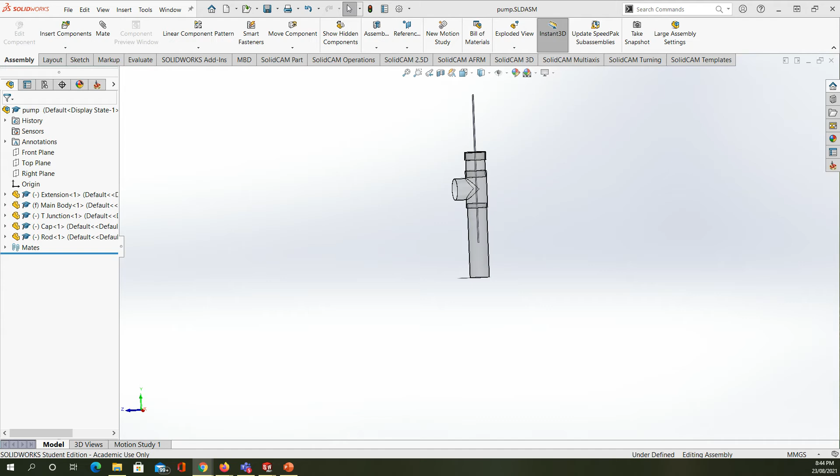Okay, so we come back to the second part of this tutorial, and I'll show you how to bring the shaft to the assembly during the lecture. As you can see here, the shaft has been inserted inside the hole and it can go up and down to do the pumping process.

Now what I'm going to do is bring the other part, which is the valve, and include it in this assembly. Just remember that I'm not going to consider the threads or the nuts here. I'm going to bring the valve and attach it to the end of this shaft. Simply insert the component - that's my valve. I'm going to put it somewhere near here.

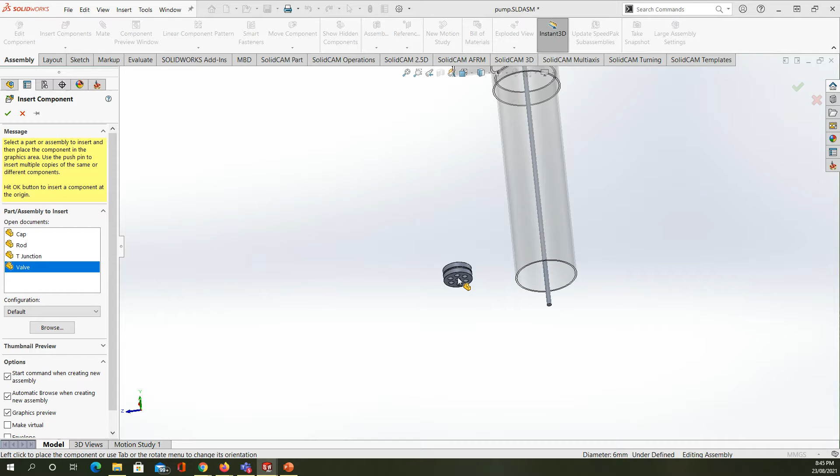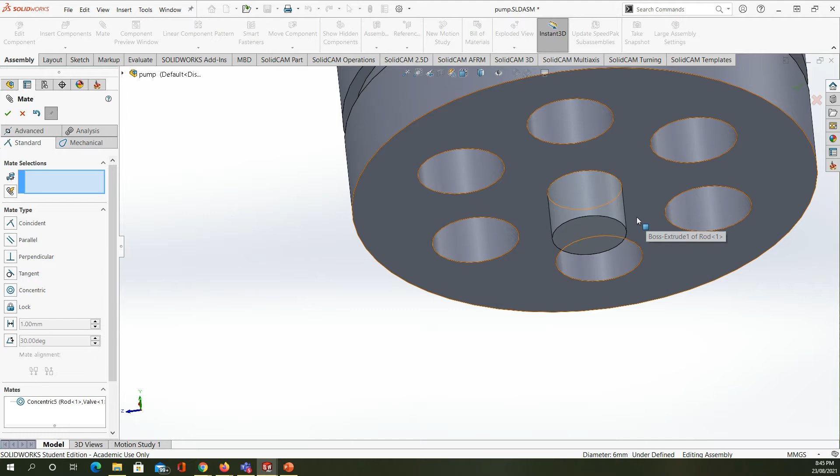And say OK. Now I'm going to do an attachment process. My mating is going to be for the following: the outside surface to the inside surface of the middle hole - that's number one. And say OK. And the other is going to be between this face and that face. And say OK.

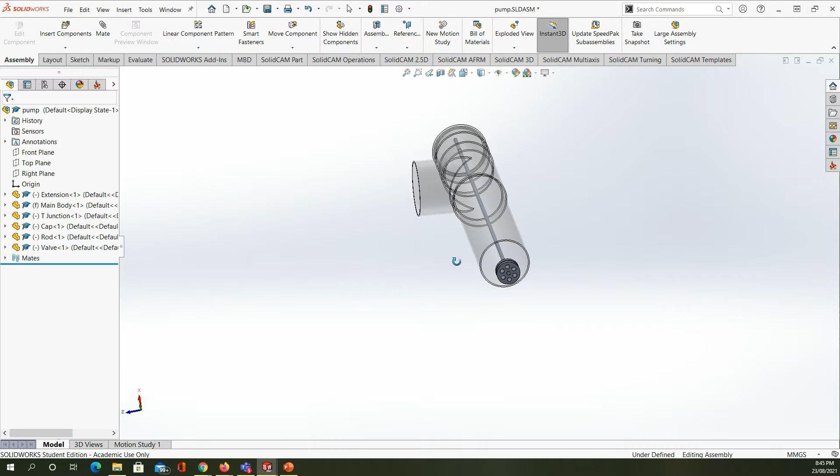I think I have wrong dimensions here. What was the diameter I used for this one? Anyway, I'll check that because it seems to be too small regarding the other dimensions. So let's go back and try to check the dimensions we have for the valve. I hope I'm not doing the wrong thing - because I left that for 1 hour, 2 hours, and I had to go do it once again. The diameter is 37.5 millimeters.

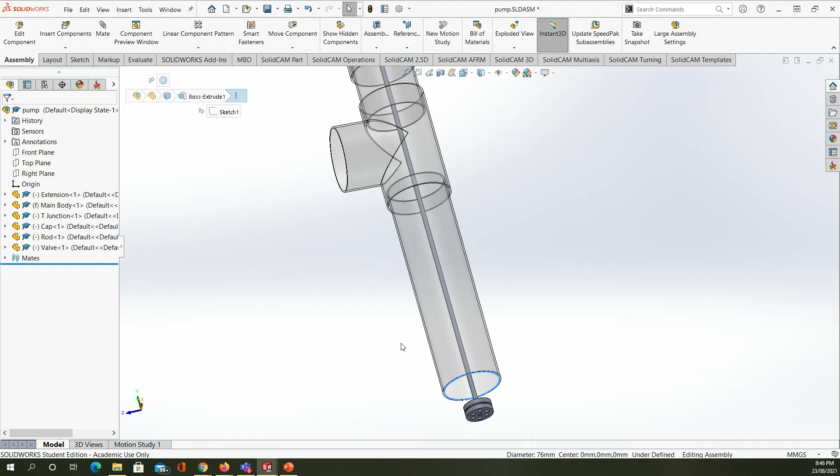Okay, so what was the diameter we have here? Why do we have this difference? 76. Ah, I just remembered - I added the radiuses, not the diameters. Sorry for that.

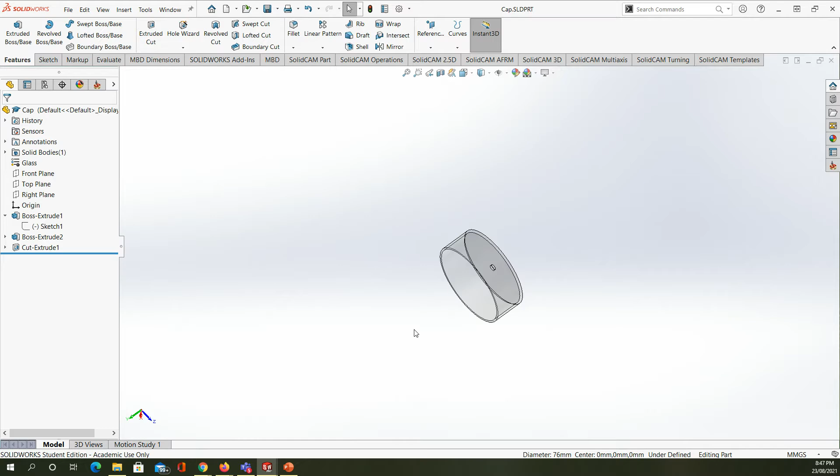Okay, well, we could consider making the bigger valve, or I think the best thing is just to change all the dimensions we had earlier and go back to the original dimensions we have. I know this may be a longer process, but this will actually be a good revision for what we had earlier.

So I will start with this one first. I did the sketching and I'm going to choose this one. It said the diameter is 84. I would like to have it as half of that, which is 42, so the radius is going to be 21. Okay, say okay. I know it may give me some errors, but I can try to fix this error as I go.

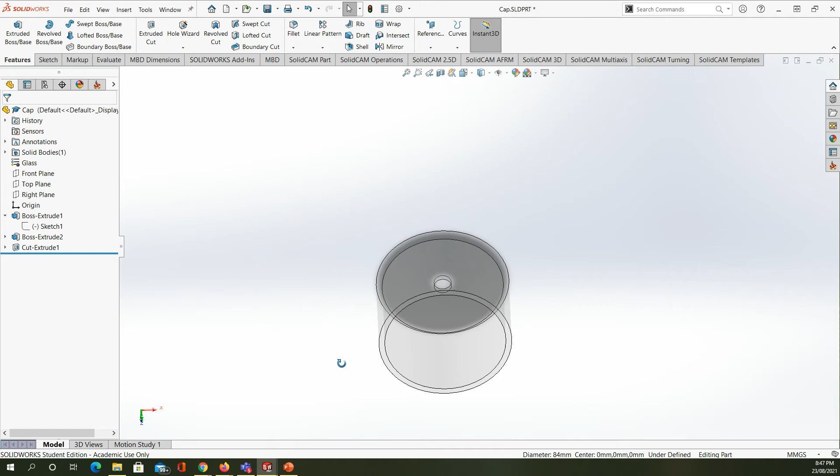Okay, now I have the small cap here. So I finished the first part and save this one. I don't want to show you the assembly now because definitely it's going to be the wrong thing. We'll go to the T-junction and again I need to fix all the dimensions.

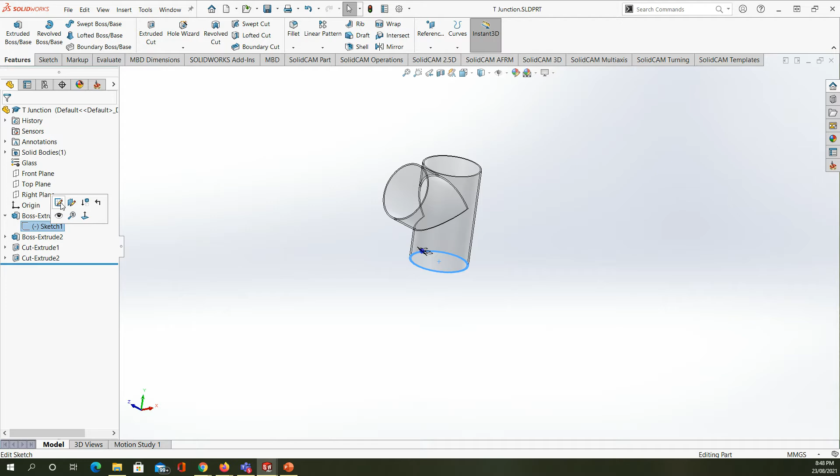As we can see here, the dimension for this circle - second - the diameter is 84 and I will need to reduce that. So starting here at the beginning, 42 for the inside one, and good - so this will be 42 again, which is 21 as the radius, 21 here.

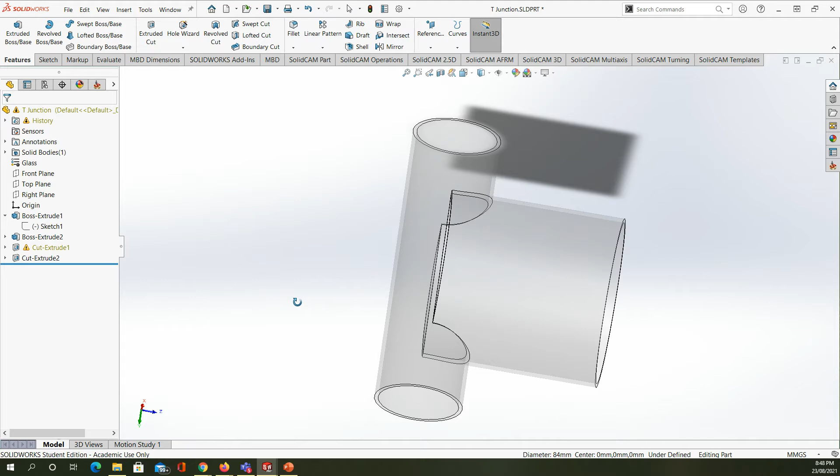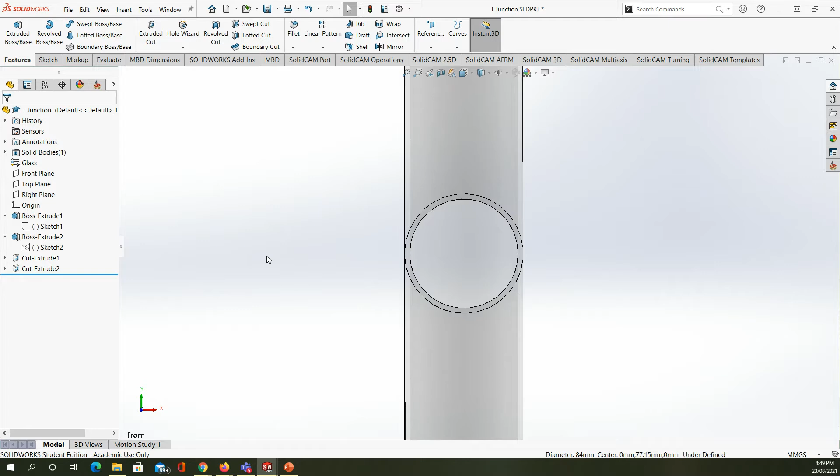Okay, and exit. Continue, ignore the error. Okay, close, because I have to change the rest of it, which will mainly be changing the diameter here. So I'm going to fix this one first, edit, and change this one to 42, just make it 21 for the radius. Say OK, and exit. It's going to give me the error message maybe again. No, now that's it. Okay, yeah, now it's all done.

So I'm going to save this part, and the other part I'm going to change is going to be the main body. So I'm going to open the main body and change the dimension of this one - simple pipe, sketch that. Change the internal diameter to 38, half of 38 is going to be 19. Say OK, and fix it.

Now the pipe is the good diameter. And finally, I have the extension. Where's the extension? It should be here. Okay, from the node, I get to open it, and I get to fix the extension and fix the diameter of the extension part.

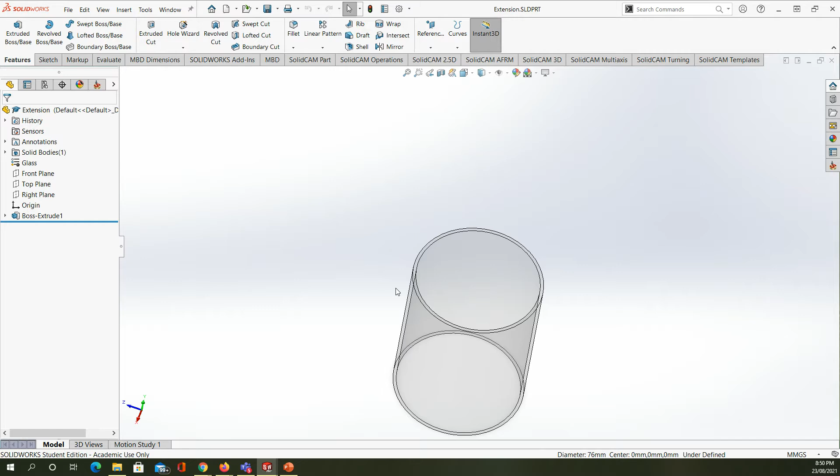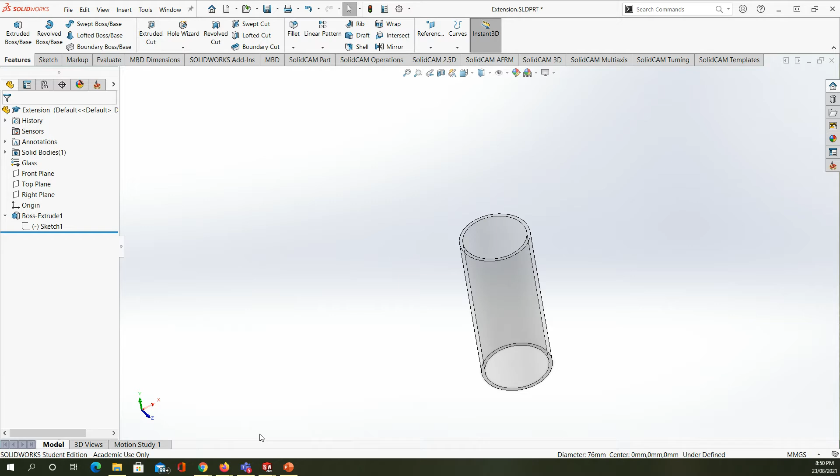Okay, make this one 19. Now we have all the parts ready, and we are going to go to the assembly and see what happened. It will ask me to accept the updates in these parts, and I should accept these changes, so I'll say yes. Okay, now I have the correct size.

So now, once again, you can see that the shaft is going to be working inside and outside the pump, doing the stroke as we said. So later we are going to add the ring.

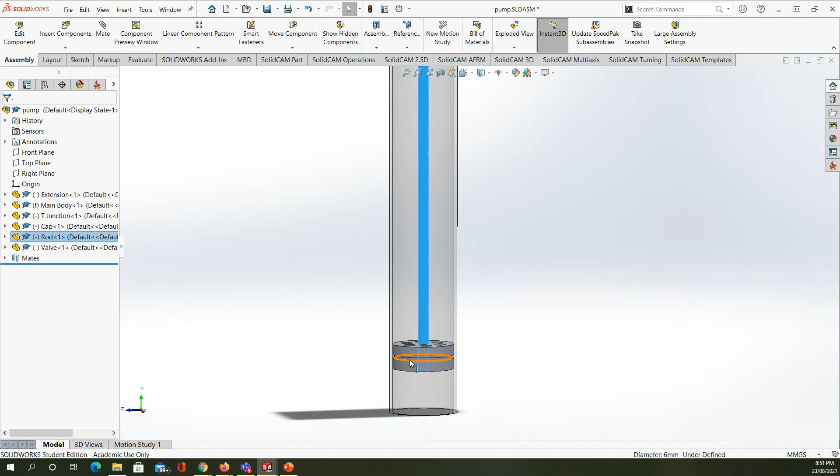Here you can see that we have some gap. We need to close it, so we can put the washer here, and we need to put another washer at the top here. The washer here is going to be at the top.

So now the process is going to be shown once again. When I'm going to pull the pump up, I'm going to have negative pressure here, and this will open the washer for the lower valve, letting the water fill this gap. Then when I push the piston down, I will cause this washer to close.

And this upper one is going to open, allowing the water to leave this chamber and go to the upper chamber. Again, if I pull the lever up, it takes the water to the upper level, filling this one, and continuously the water level keeps coming out of the pump.

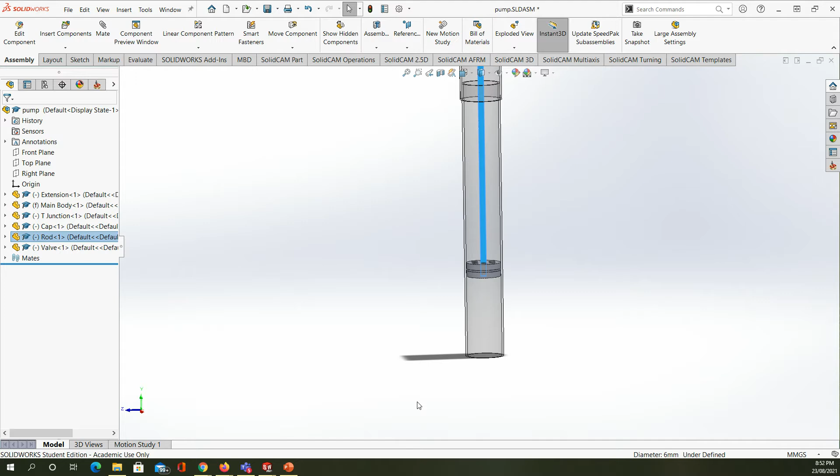Okay, now let's finish the bottom valve, and of course I had to make the washers at the same time. So I will go to this one, and I'm going to use it to build the foot valve.

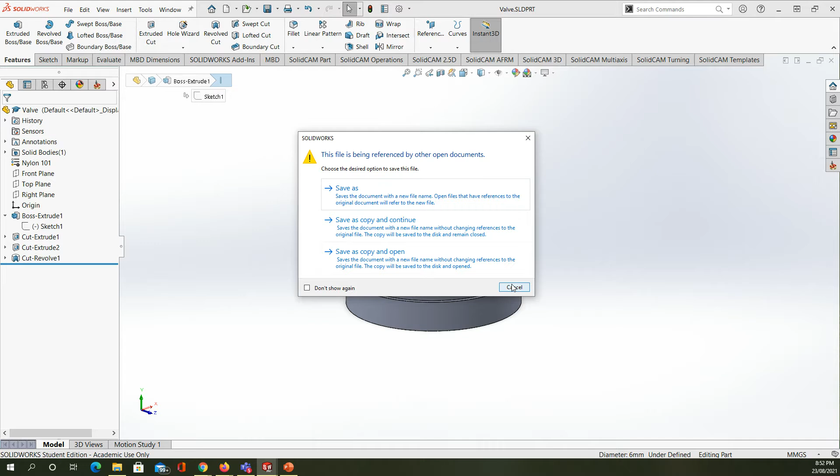So I'm going to save it first as the foot valve. Save, okay, just give me one second. I'll save it as it is before going to the next stage. Now File, Save As, and cancel this one, save it as the foot valve - just add 'foot' in front and save it.

Now I'm going to make some modifications for this one. I'm going to increase the base here, and I'm going to remove this cut revolve - I don't need it in the case of the foot valve.

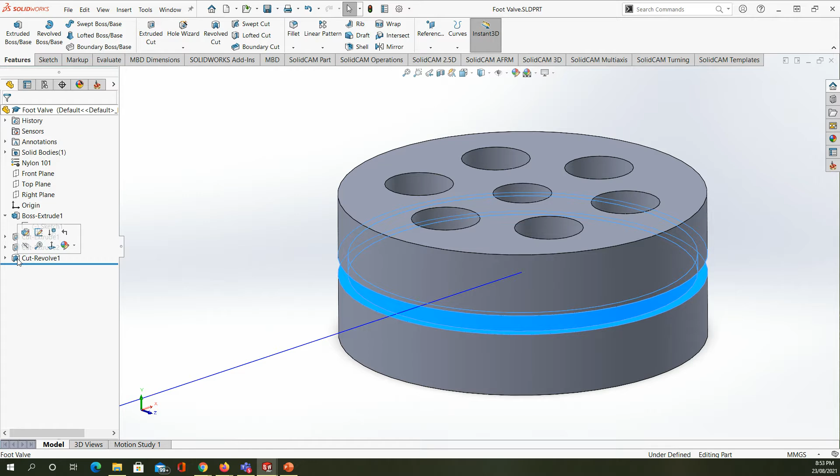So just select this operation and press delete. I don't know why it doesn't work. Anyway, delete, yes - okay, now I removed this one.

And what I'm going to do is the following: first, I'm going to delete this sketch totally, I don't need it anymore. So, yes.

I will show you the easiest way to add a chamfer to this side. So I'm going to click on this surface, make a sketch, click on the edge here, and do the convert of entities and do the offset. I get to choose this line to have the offset for - it doesn't have to be 10 millimeters, 2 millimeters will be enough.

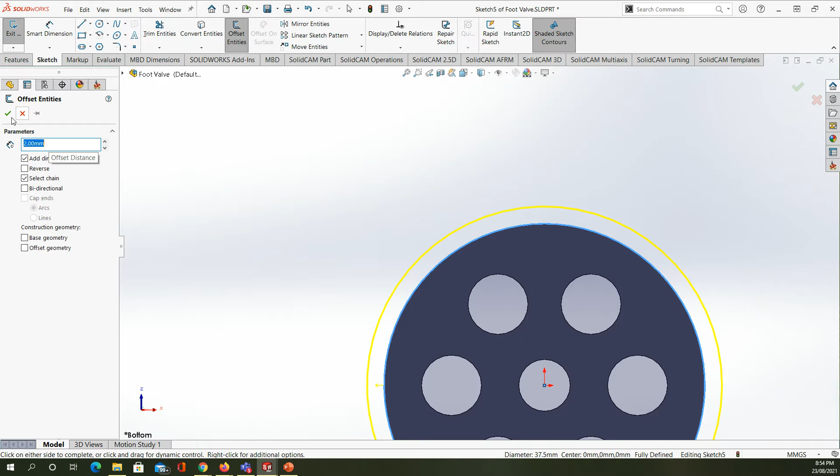Okay, say okay. Now what I'm going to do is extrude this one to the top here, so I will do Features, Extrude. I'm going to choose what part it's going to be - actually, I'll choose to have this one. I'm going to extrude to the other way, taking this one to 5 millimeters only, so I'll choose 5.

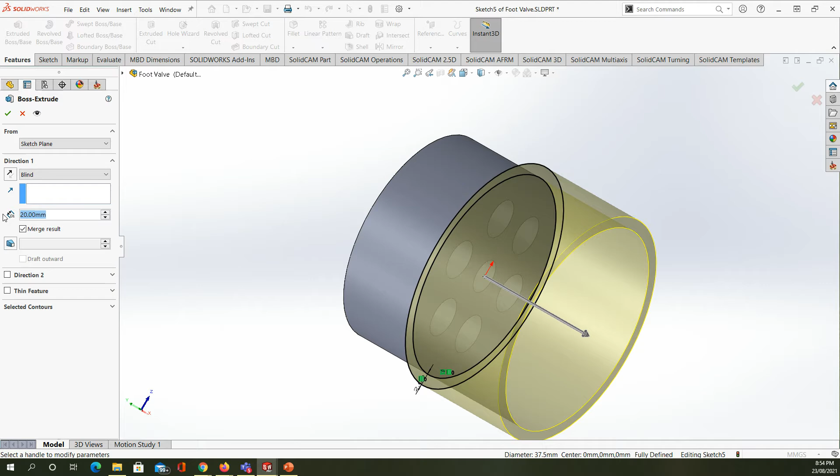Okay, enter. Sorry, move to here, and then again reverse direction, so you can see it will go to this side. I think I'm going to make it a little bit more than 5, so maybe 7 millimeters will be okay. Okay, and press enter, just want to check.

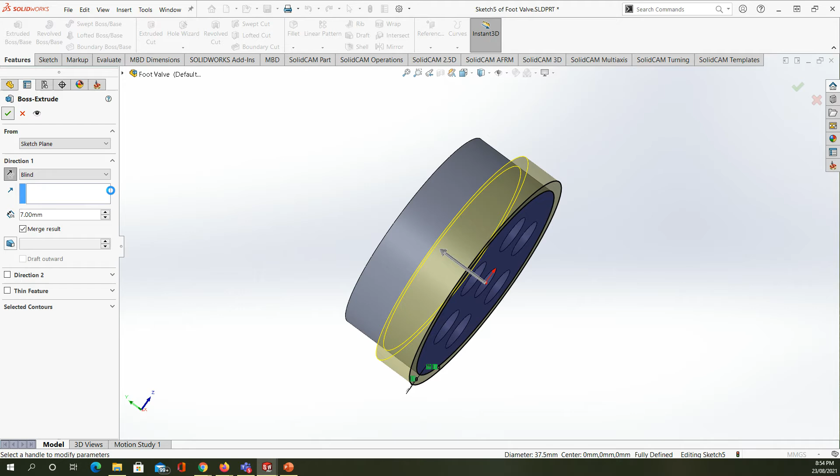Yeah, the hole is still there, so the foot valve has been done. Again, to save this one.

Now what I need is going to be the washers. I'm going to make the washers individually, and also the pin which is going to be connecting the washer to the foot valve. I'm not going to get the foot valve into the assembly yet.

For that I'm going to make a new part, and I'm going to call it the washer. We need 2 of the washers, so I'm going to first do the sketch. The washer is going to be just a disc made of rubber.

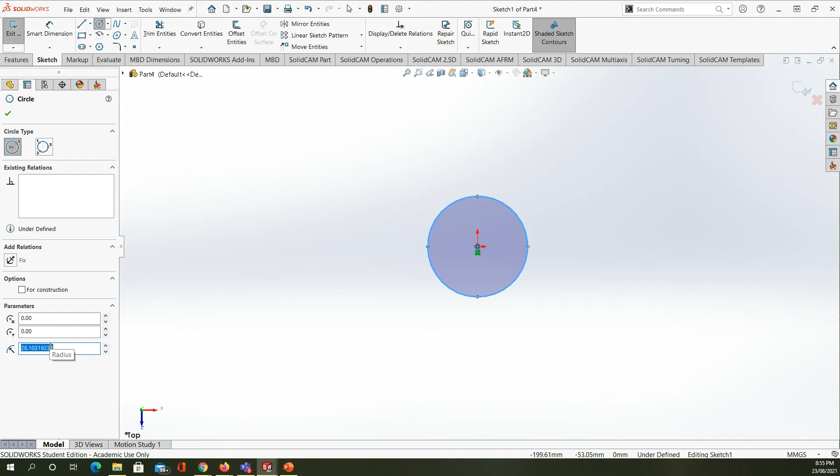The diameter is going to be less than the valve diameter itself. You remember that the diameter was 37, so I'll make this one have a diameter of 35, meaning a radius of 17.5. Okay, I will give it a thickness of 2 millimeters only.

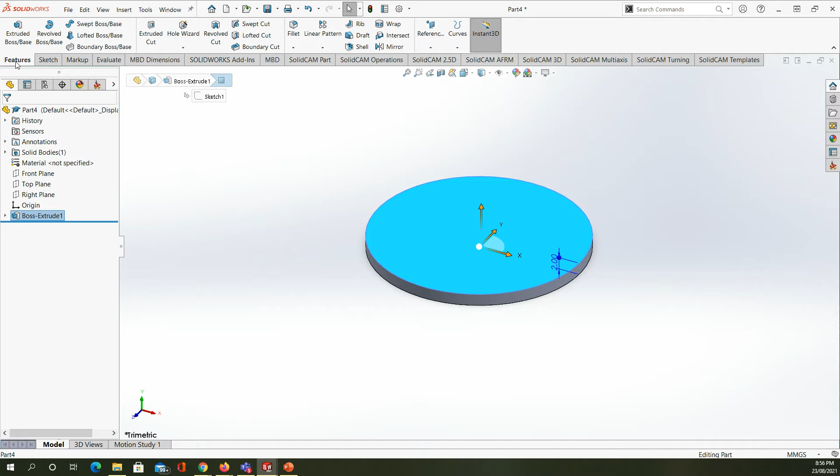Okay, I'm going to make a hole in the middle of 6 millimeter diameter, which is 3 millimeter radius. Say OK, and extrude cut this hole all the way down. Say OK. Now I have the washer.

I'm going to define the material of the washer to be rubber. Edit the material, close that, and go for the other non-metal materials. Do we have rubber here? Foam rubber, yep. Apply, close. Now we have the rubber. Save.

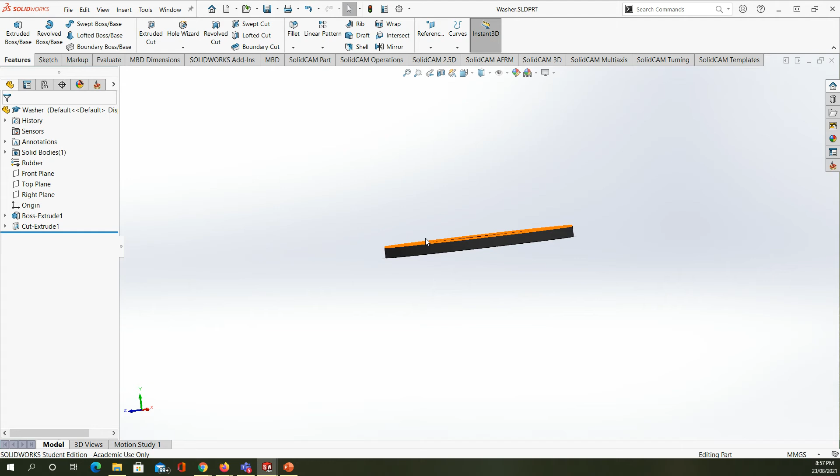Okay, so this will be the washers. Save. Okay, now the last thing I'm going to make is the pin or the bolts and the nuts, but I'm going to call it pin. The pin I'm going to make is going to be very simple.

Make a part and sketch extrusion for the top plane. Make a circle, 3 millimeter radius. Say OK, and then I'm going to extrude this one to, let's say, 15 millimeters.

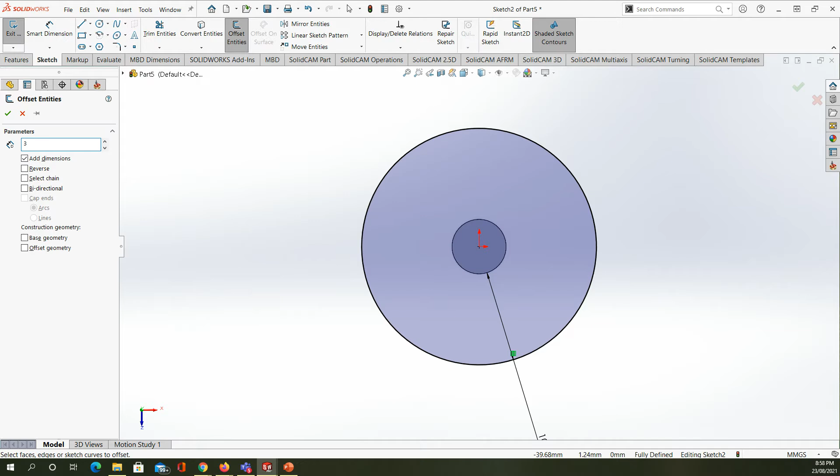And then I'm going to choose the top face, sketch, offsetting the entities of this line only by 3 millimeters, maybe. Sorry, 3 millimeters. Let's see how it's going to look like. It doesn't work, okay, so I'm going to undo this one and repeat the process again.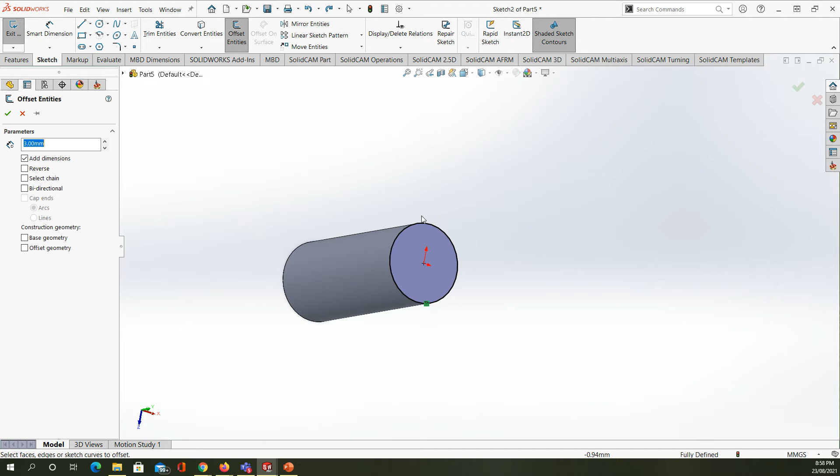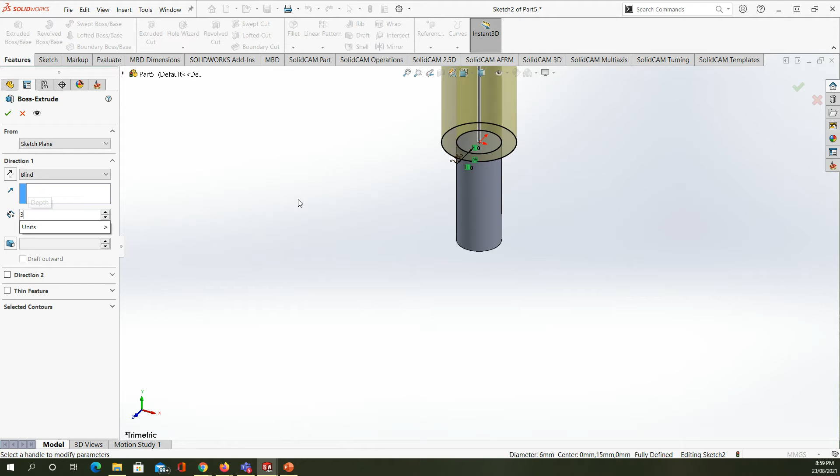So I'm going to do the convert of the entities, and do the offset of the entities of this one by 3 millimeter. This 3 millimeter is quite high, so I'm going to make it 2 millimeters only. And I'm going to extrude this one by 3 millimeters. Now it looks like a proper pin.

And I'm going to use this pin to fix the rubber washer on the foot valve. So again, to save that - sorry, cancel, cancel, cancel. Okay, so again, to save that, instead of save, save as the pin.

Now I'm going to take this part to the assembly and finalize the pump. So we go to the assembly, okay, and I'm going to import the parts. First I need to push this one all the way down and start to insert more parts, so I'm going to bring the foot valve first.

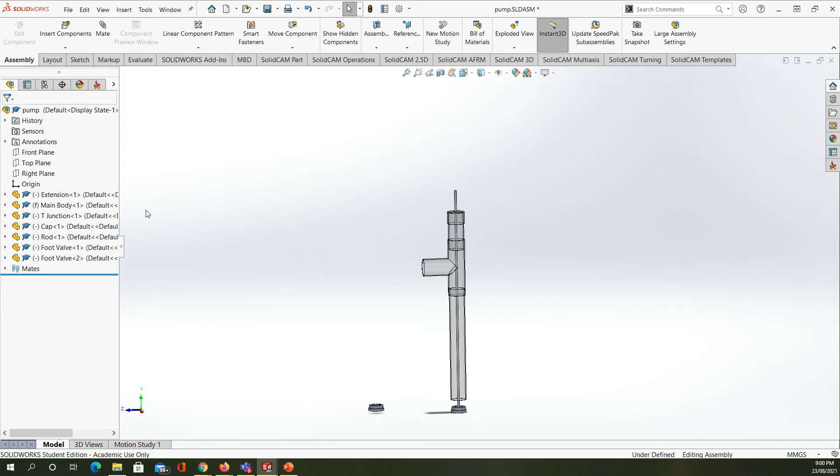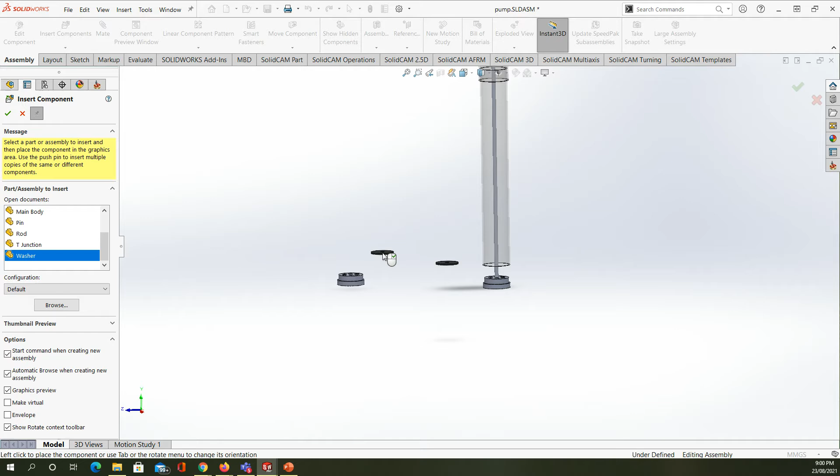Okay, I'm going to bring the washers, and I would like to have - I keep pressing the washers. I'm going to bring two of them, so I click on the selection, look for the washer. Again to bring two of them, that's one, that's two, and that's it. I don't want the last one, so close that. Okay, now we have the washers and we have the foot valve.

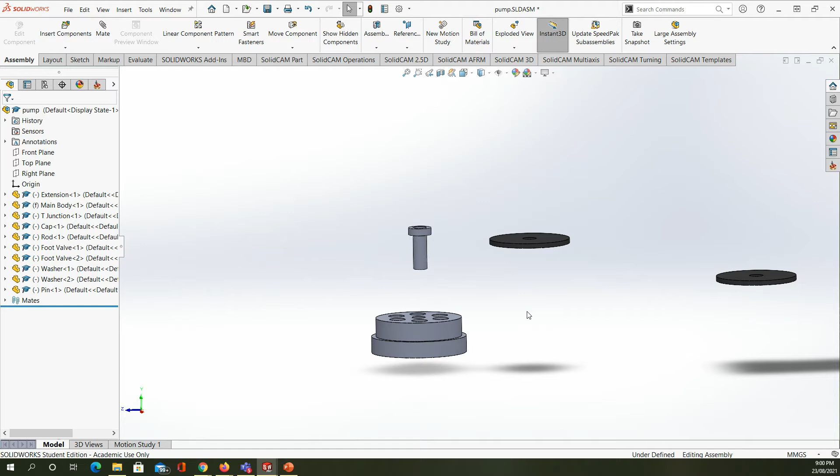We need to bring the pin, so I'm going to bring the pin now. This will be the last thing I'm going to bring in my work. Now, the first assembly is, the first mate is I get to bring this washer to the top of this valve. Oh, wait a second.

So I'm going to open the valve and try to fix it. So open the valve. That hadn't changed, so the valve must be the same.

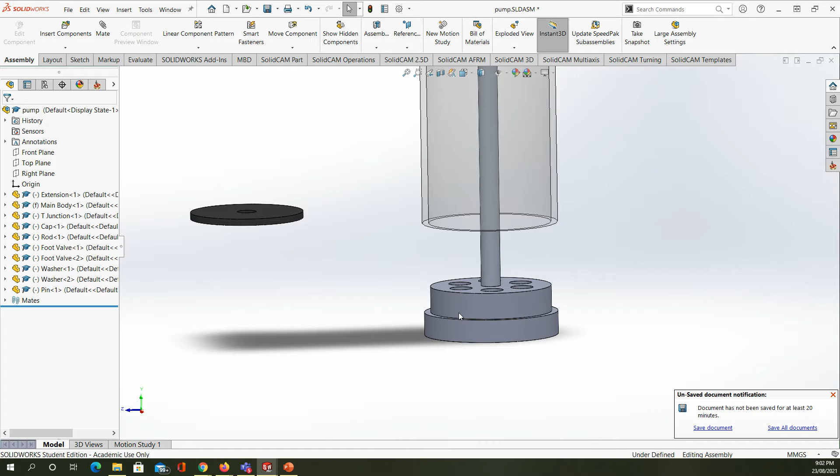Oh okay, so I'm going to fix that very soon. I'm going to delete the two foot valves and add only one of them. I need to change this one. First I need to save the work, save all, rebuild and save.

Okay, now you can see that the foot valve has been repeated, so I'm going to delete this part. Yes, and bring the normal valve. Okay.

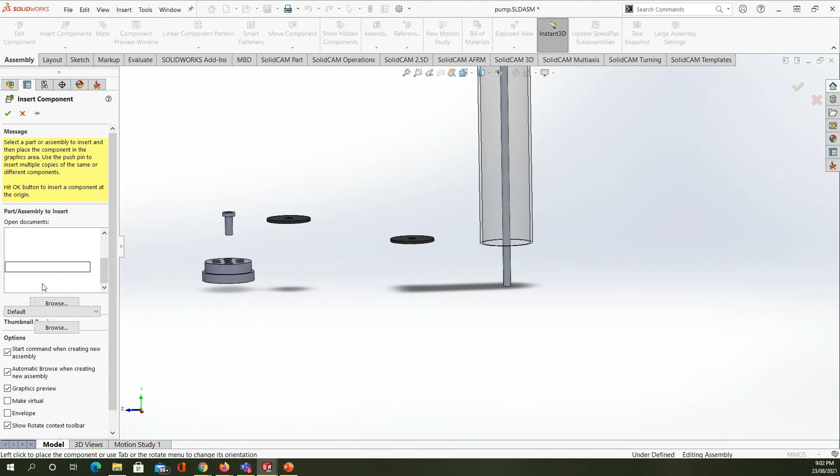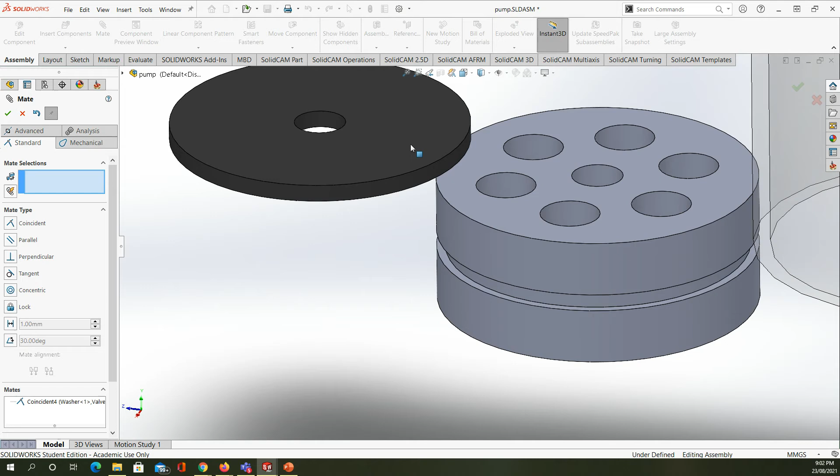And I'm not going to make the ring washer now, I'm going to make these parts together, so my mate now is going to be much easier. Just make this face over this one. Okay, mate this side to that side. Okay, now we have it in the middle.

Now I'm going to bring this thing to the rod. So I'm going to make the internal cavity of that to the external wall here, and make this surface to that surface. Okay, now I have the valve with the washer.

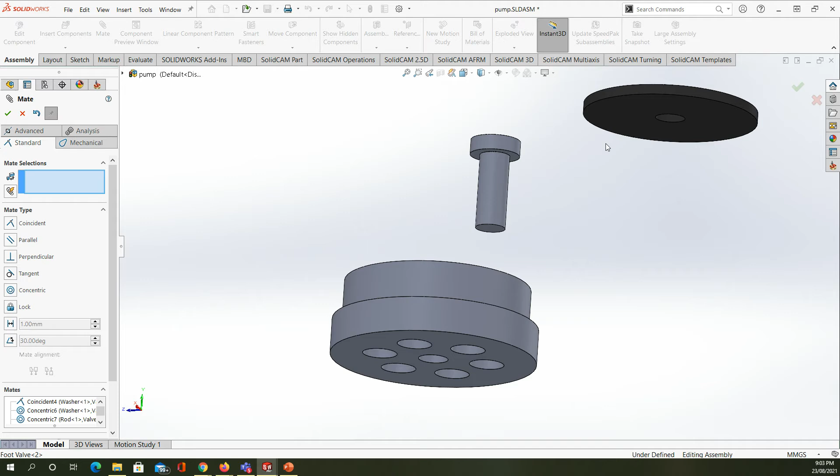Now let's go and assemble all these parts together before I get to put it in. So the first thing is make this face to that face, make these sides together as we did earlier.

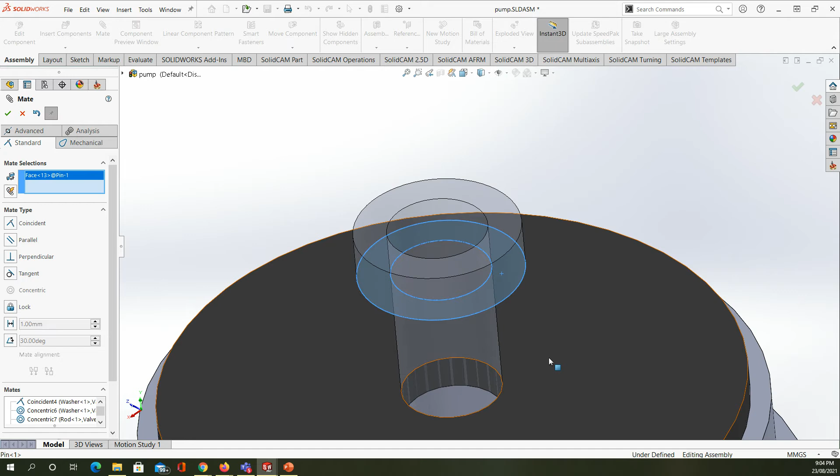And then putting the pin to fix the washer in. Done. I made the part ready.

Now the last thing is, again, as you can see here, there's a valve. As we are going to pull the water, this valve will be opened up, letting the water fill this chamber. Now I'm going to bring that inside here.

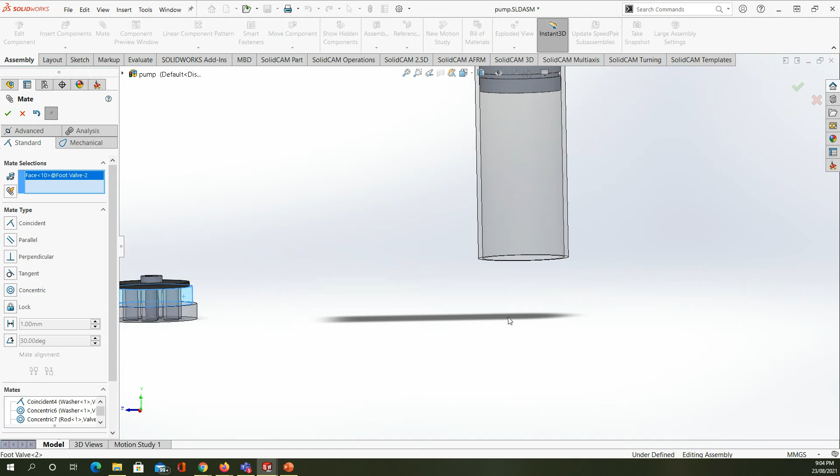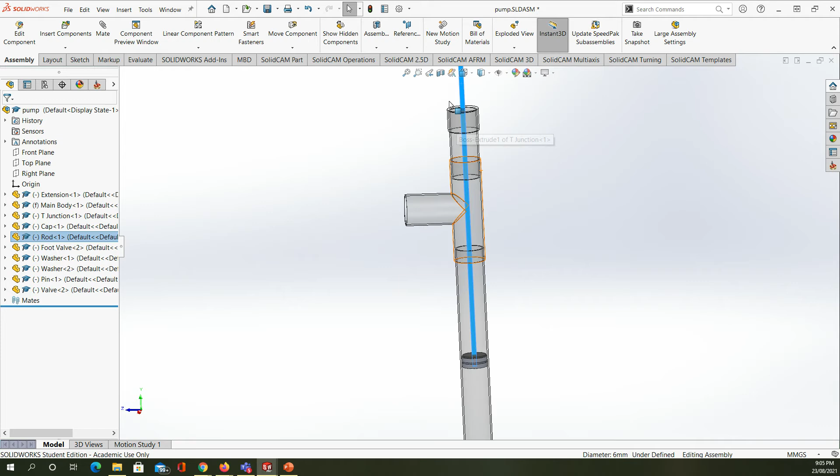Okay, so that's what will happen. Just pulling the things up and down. We'll be making the water fill the lower chamber as we pull it up. This washer is going to be closed. This washer will be opened, letting the water in, get filled. Then I'm going to push this one down.

The pressure here is going to be positive. I'm going to let this washer get down, while this one is going to open, letting water come up. As the process is continuous, we're going to do the pumping and the water will start to come up from this exit.

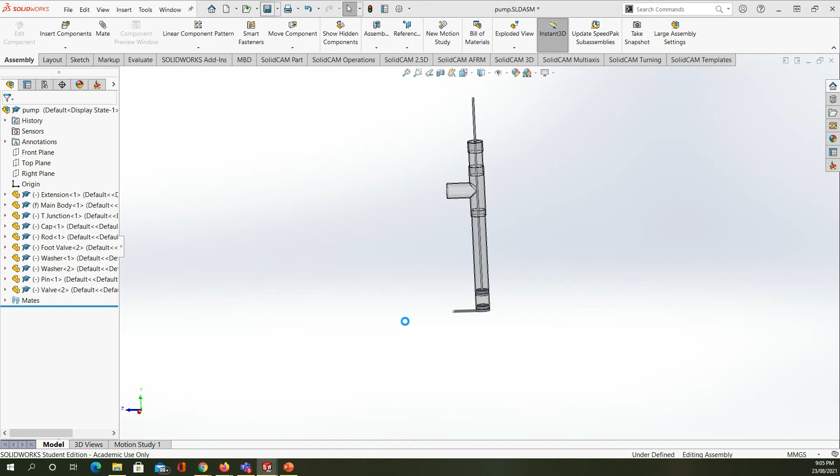Yes, we build and save the document. We finished the first design. Now I will show you different designs as long as we have some extra time before I start doing my other task. I'm going to close almost all the parts we have here, but that will be after making a new part.

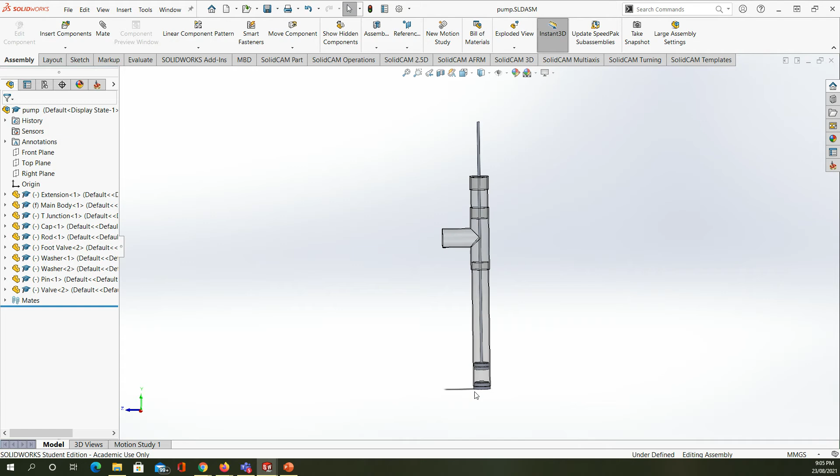I'm going to design a new foot valve. That will be step number one. Also, we can have multiple of these valves sitting here and here. This will be the multiple stage pumping operation. I'll try to do this one, but I need to modify the valve.

So anyway, just give me 1 second. So I'm making a new part, say OK. And I'm going to close this because you know that SolidWorks usually adds too much load on your computer, even through the VMware.

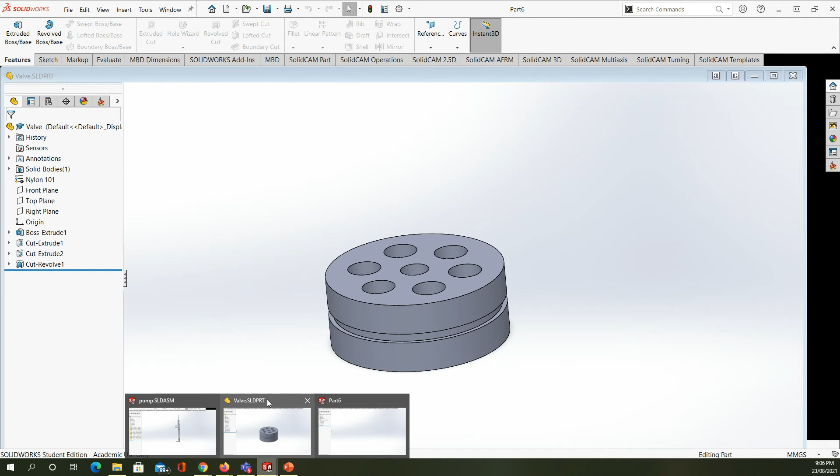So I need to close it. The foot valve will remain the same. The main body is the same. Extension, the washer, the pin, the valve. I'll leave the valve, and I'm going to make the new part.

Now I will give you more challenges on doing this. Well, that's one of the problems we have with the workspace. Now the thing is getting black, so maybe if I press here somewhere, this will make things better.

Anyway, I'm going to close this part and make a new part. A new part. That's great. Anyway, make a new part. Okay. Now we have a new part, and I'm going to make a new foot valve for you.

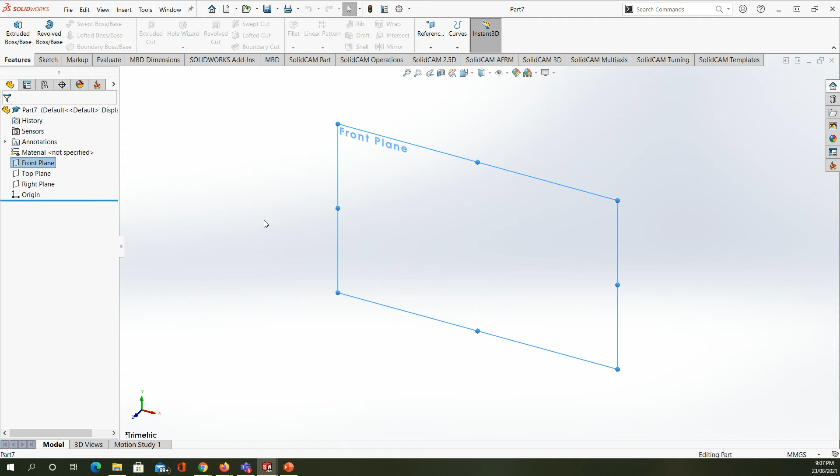So the valve I'm going to make now is going to be the conical shape. So I'm going to make two parts and assemble them together, and they will represent my foot valve. So first I'm going to work on the front plane. Yeah, I'm going to work on the front plane, and I'm going to make a sketch for the part I would like to have.

So I'm going to have a corner shape, rectangular shape, and I will make this one have the diameter of, well, it's going to be radius because later it's going to be revolving. I'll make the length 19, which is half of 38. So 19.

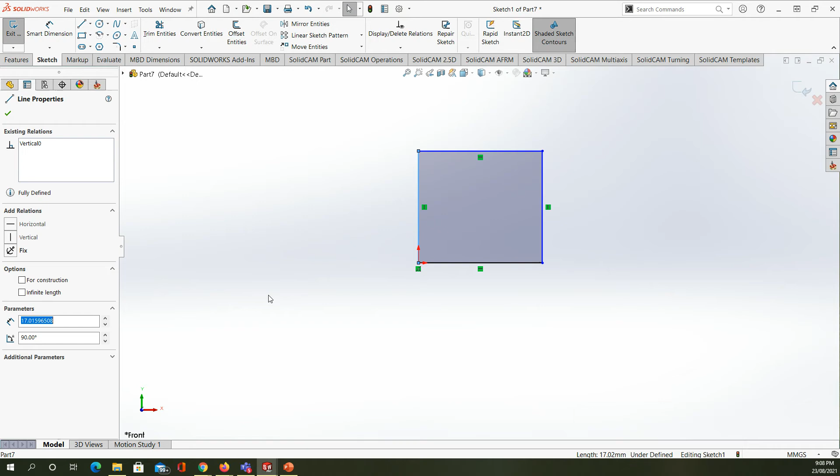And the height to be equal to 5 millimeters. This will be the first part. Now, I'm going to continue editing that. So I'm going to add a line starting from here, going to... I'm sorry, that will be the top part. I was mistaken with that. So this one's not going to be 19, it's going to be 21. 21, that's the base. Now I'm going to add the part here, which is going to go up to make a conical shape.

This should have a hole in the middle. Anyway, I'll make the hole later. Yep. So I will make a line from here to here, which is going to have a distance of 2 millimeters.

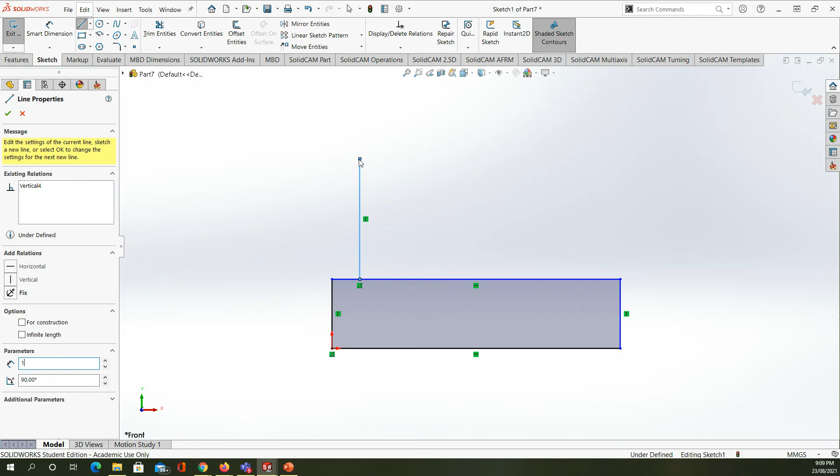Two, let's make it two. We go up, let's say something about... I'll make it 10, 10, 10. Yes, 10 is going to be okay. And then I'm going to make that shape.

Okay, now this will be a triangle. Now I would like to remove this section, so I'm going to use the trimmer to do that.

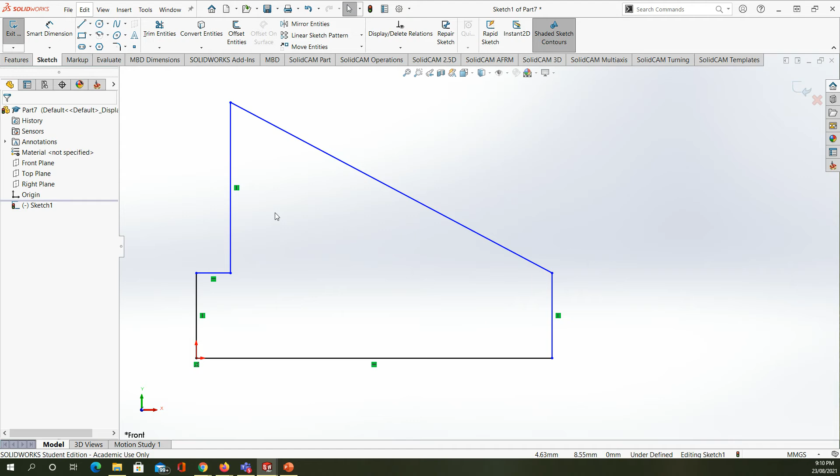Now I'm going to revolve this part to have the conical shape. So to do that, we can simply go to the features, and I'm going to do the revolve of the boss and the base. I'll revolve this area, select this area, or you can do it through the selection of the contours, and do the revolve along this axis.

So I'm going to have this shape. You can see that this shape is closed from the middle, so I'm going to make a hole here. Just inspect the part carefully.

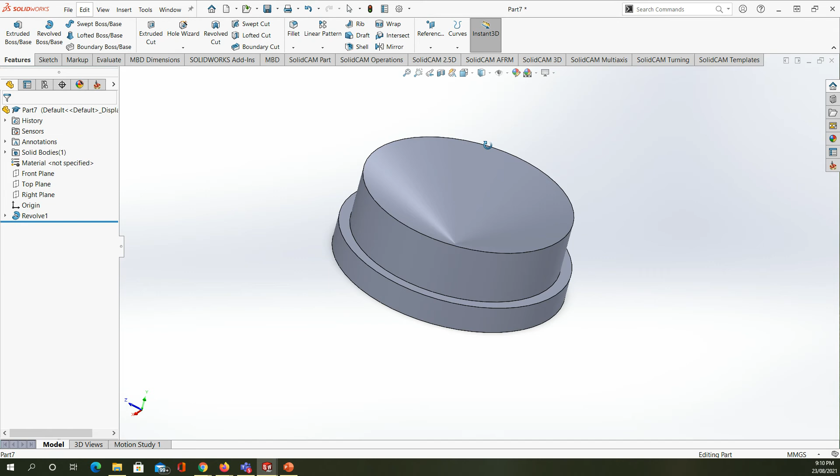Okay, and I'm going to repeat the process again. Just before the revolving, the shape was quite simple. We just made a rectangular shape here, which has 21 millimeter length, going to have a diameter of 21 millimeters, and above the height was 5 millimeters.

This will be the collar. The tube will be stopping here. Then I add a triangle here, which has one side to be

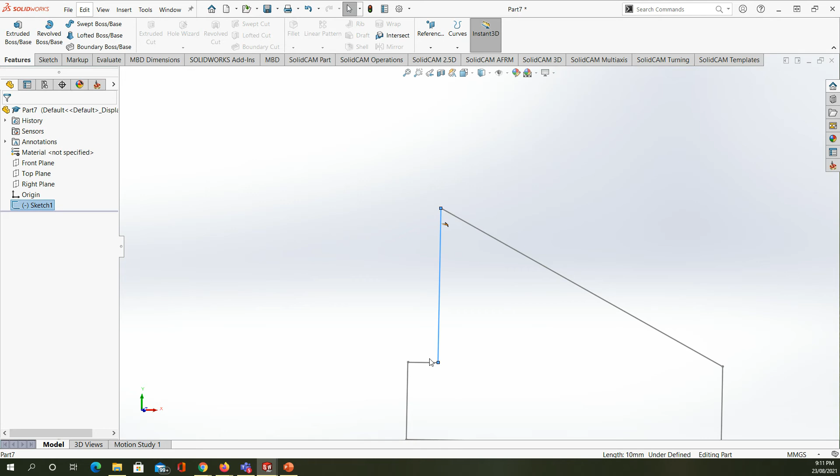the 10 millimeter height, and the base length is going to be 19 millimeter. So I remove the line between the triangle, merge it with the triangle shape and rectangular shape, and then again to revolve the boss and the base.

I choose to revolve this area along the line in the middle, and I made the shape of the valve.

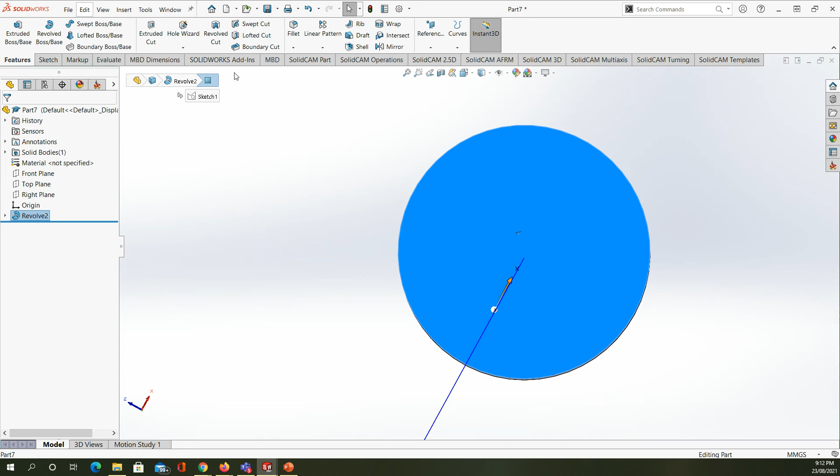Now I'm going to go to this side, sketch, make a circle in the center. Well, if I cannot locate the center directly, I have more than one solution. Again, to make a line, line will start from this side, ending to the other side, and the center now will show up. So I will delete this one, make it a construction line, then again make the circle sitting here.

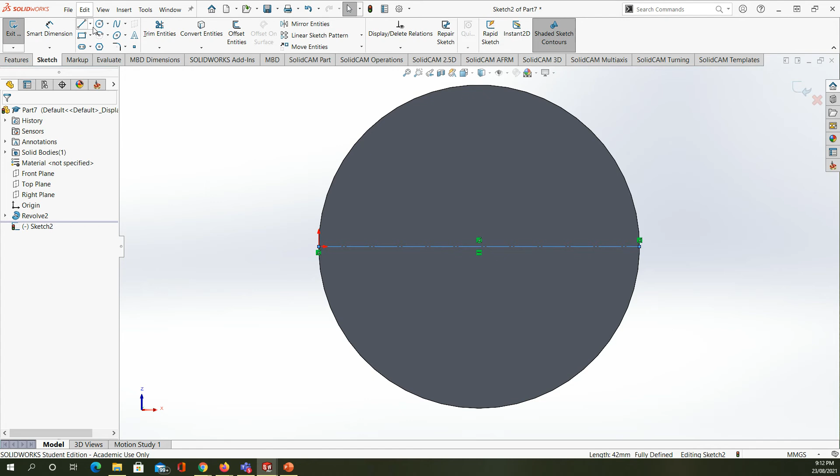Now I'll decide that the diameter of this circle to be something about 5, 7... I will make it equal to 8 millimeter. This will make it 16. That's quite high, so I'm going to choose 7.5.

Okay, and I'm going to use this one to have an extrude cut all the way to the side. Cut. Okay, now I made the valve.

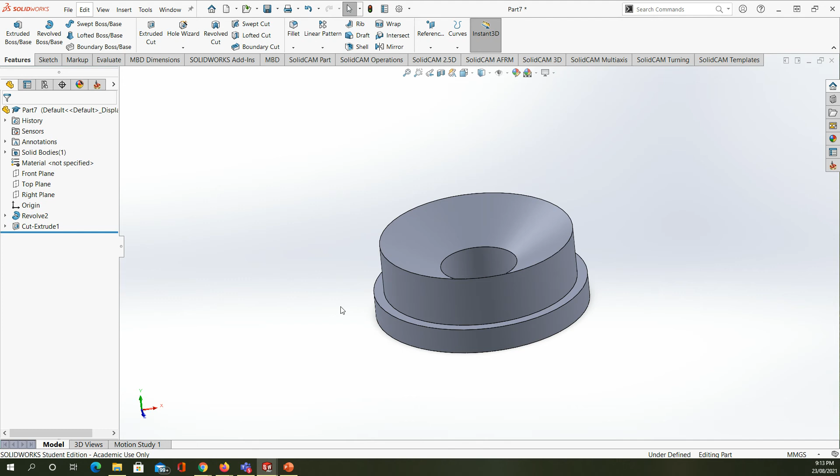Now this valve will require to have the ball, which is going to close this hole when it comes down. So usually I'm making the ball individually, and this will be another part. So this will be saved as foot valve.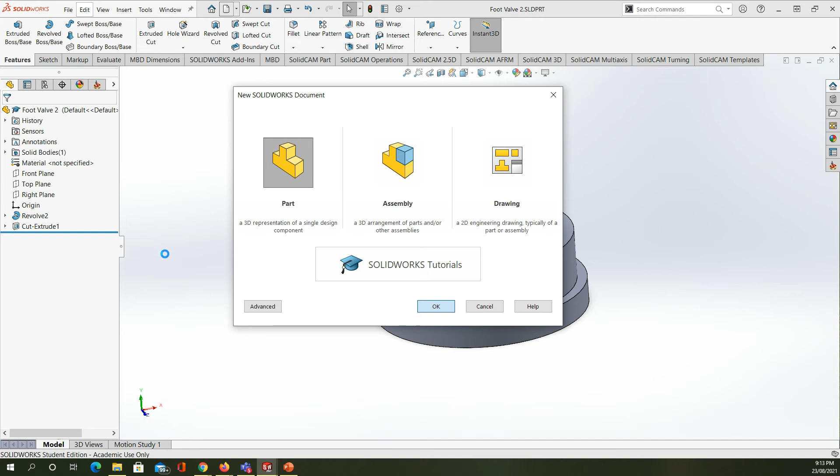Now I'm going to make the ball. Sketch. I'm going to choose the front plane again, and sketch on this one. Now this process is going to be quite simple. I'm going to make a circle.

It's going to have the maximum of... I don't want it to be 29 for the radius, this will be too large. 10, 10 is going to be good. Okay, well, make it 12. 12 means 24. Yeah, 12. Let's make it 24 millimeter diameter.

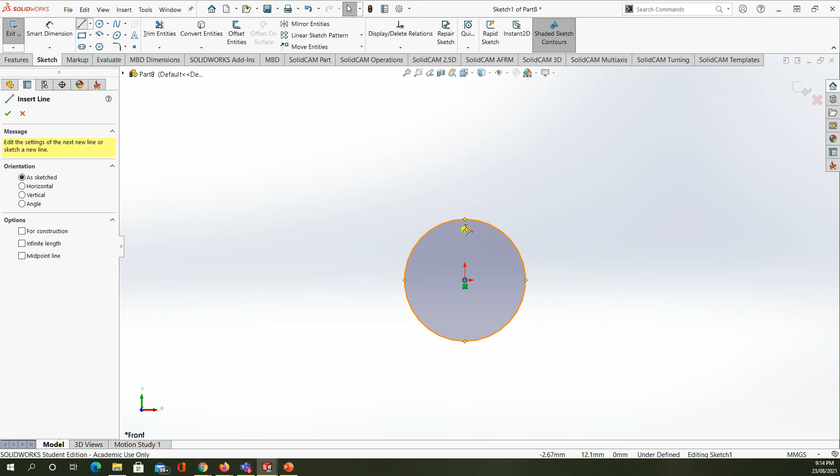Say okay. Oh, I didn't define the material for the pump we have there. Anyway, I'm going to choose the material here to be something quite heavy. For example, that's not going to float because floating is going to be a problem for us. So actually, pulling, pressing, no, actually pressing will push the valve down. So anyway, I'm going to choose a certain material to make the ball.

So maybe I'm going to try to choose... the plastic is going to be floating, and I think we can use ceramic because it's going to be water resistant, and also quite heavy to drop down. So I will choose the ceramic, and there's going to be something like non-metals: generic glass fiber, carbon fiber, silicone, rubber, woods.

Okay, so let's go for the other metals and see if we have the ceramic. No, it's not here, cannot see this one actually very clear. Zinc, aluminum, plastic. No. Silicone, rubber, woods. That's strange, they don't have the ceramic here.

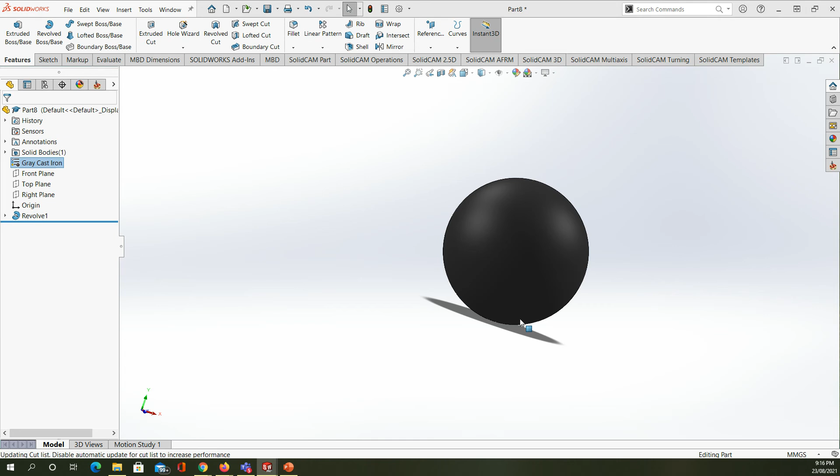Other metals, yep. Okay, I'll use something like gray cast iron for the ball, or it could be steel, doesn't matter. So I made this ball. It's going to be quite heavy, so it will tend to go down unless we get negative pressure, then it's going to fly up.

I will change the material for foot valve number 2 to polymer, the material we use for 3D printing. Let's go to the plastic and choose any polymer, like nylon 101, which we use for 3D printing. Apply, close, and save this one.

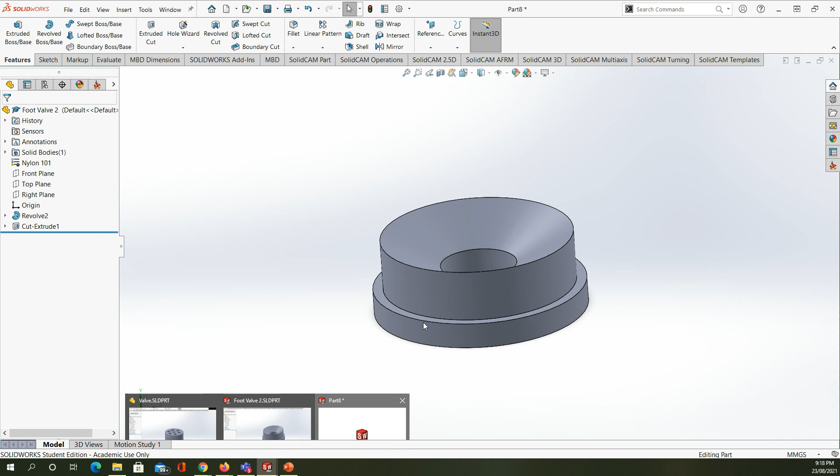Now I'm going to put the new valve on my assembly. It seems this one is giving me an error, so I'm going to close it and open it again. Oh no, it's working here. Okay, I didn't save the ball yet, so let me save it.

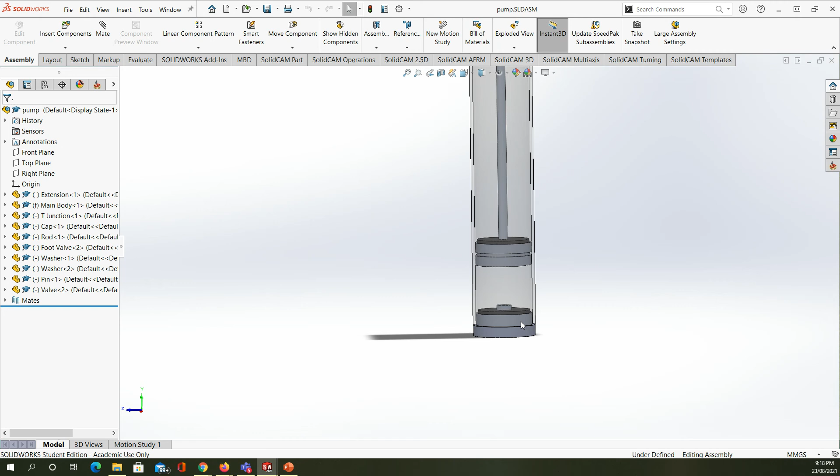I'm going to open the assembly and try to change the foot valve with the new valve we have. So we go to the pump, say open, parts. I'm going to delete the foot valve and install the new foot valve instead.

On this one, I don't need the pin, I don't need washer number 2, and I don't need the foot valve. So I'll select these 3 parts, control-select them, then right-click delete, or press it and say yes to all. I remove these parts, and then import my new component.

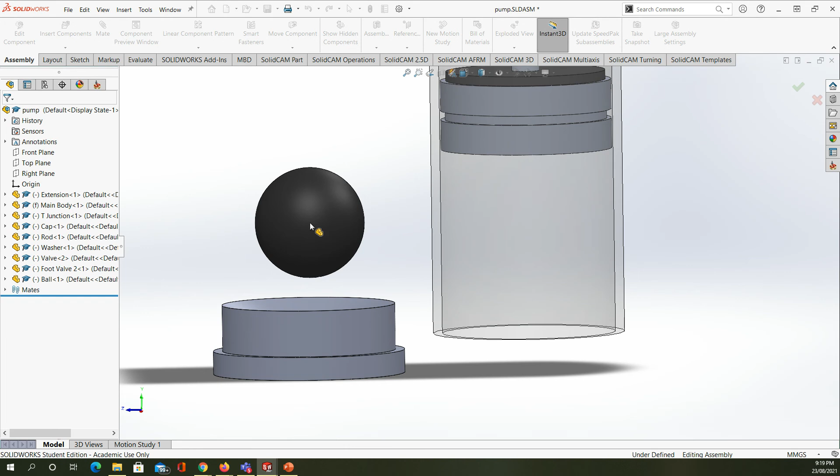That's foot valve number 2, and then I'm going to bring the ball. Now I'm going to fit the ball on top of the valve, mainly just attaching this surface.

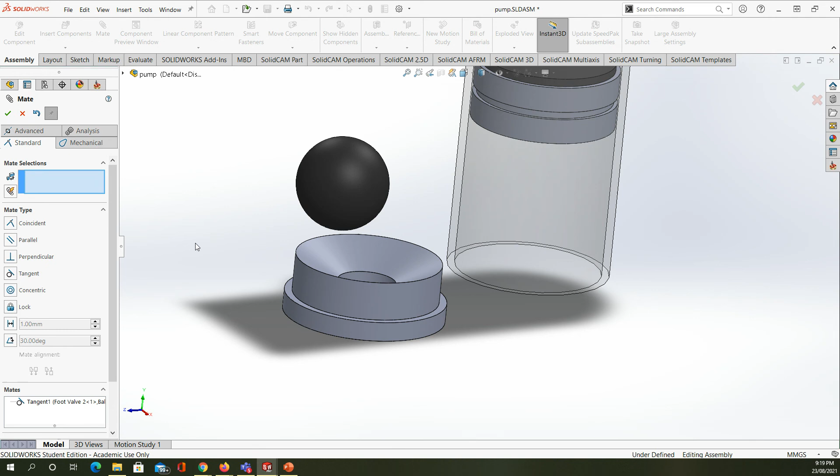It's not attached yet. Ah, that's right. Anyway, let's try to pull it myself. Okay, so it's sitting here - that's what we want. You can see it will sit here due to the weight, and this will close the valve.

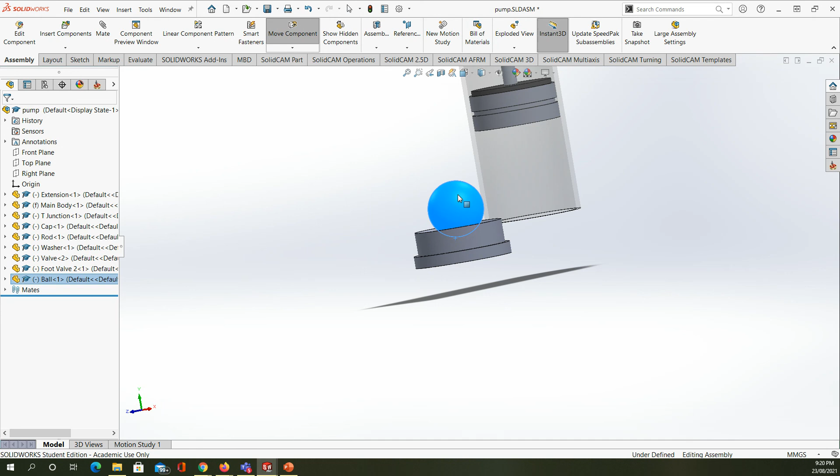When we pull the handle up, the negative pressure here will make the ball float up. Again, to delete the last connection we have. So the ball will go up when we pull negative pressure, and when we push it down, it will be fixed and close the opening here.

Okay, I will repeat the mate process just to be sure they're connected together. So, okay, just to check the location of the ball - yeah, I just need to pull it a little bit to the side.

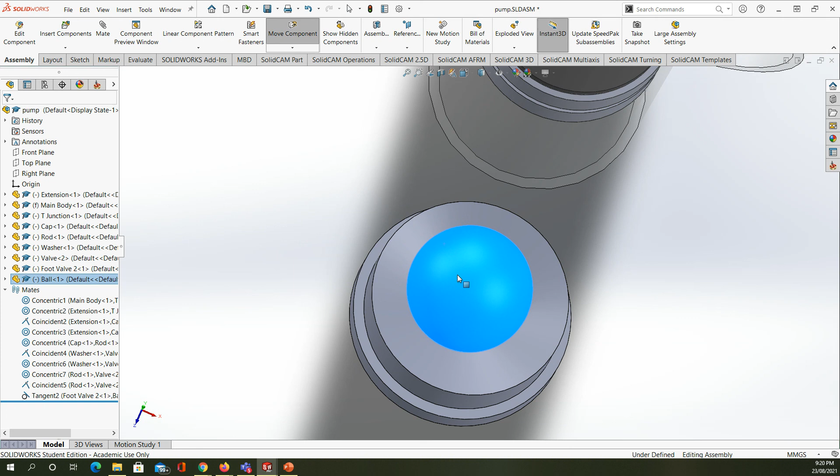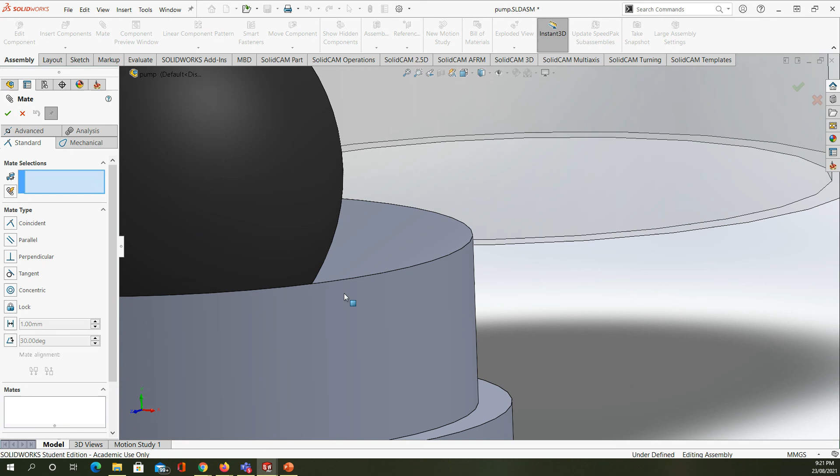That's perfect. Now I'm going to insert the foot valve to the pump assembly by doing this operation, this face, that face. Oh, I selected the wrong face, so this face instead. And of course this one is going to be to the outer side.

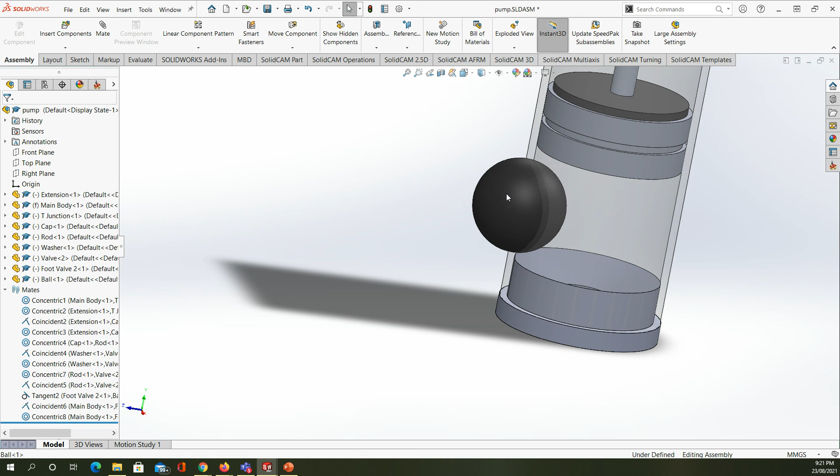Oops, the ball didn't accept going in, so I need to push the ball in. Okay, so the ball will be sitting in this location. Now this is another type of the valve.

Actually, the original design of this project was meant to have the ball valve instead of the valve with the machine part. We can do many things - as I told you, if we want to pump the water to a higher level, we can add a multiple stage valve which can take the water to the top.

Now your discussion is going to be mainly about how to make these valves - is it 3D printing? This will work if I make a prototype. But if I get to make 1,000 of these pumps, I need to make the process more commercial, so the valve would be made by plastic injection molding, for example.

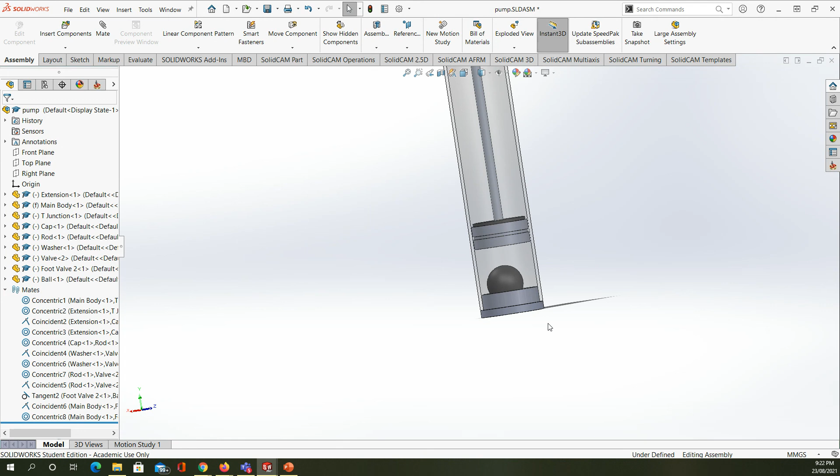So these are the points you need to discuss during the operation. Even choosing all the material for this valve is going to be a point of discussion, and how to make these valves is a very important thing. I'm going to give you some hints about how to work with such complicated processes.

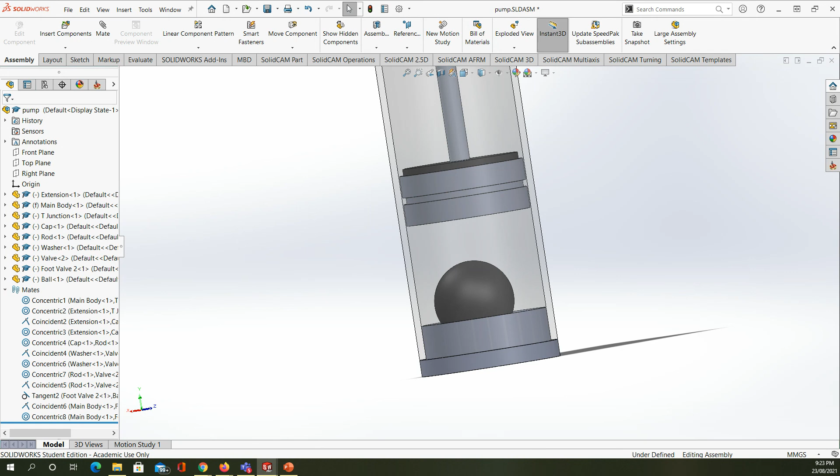I will stop here and work on the minor project. We're going to have a discussion session during this week, and we'll go into more detail about the proper design we may have for our hand pump.